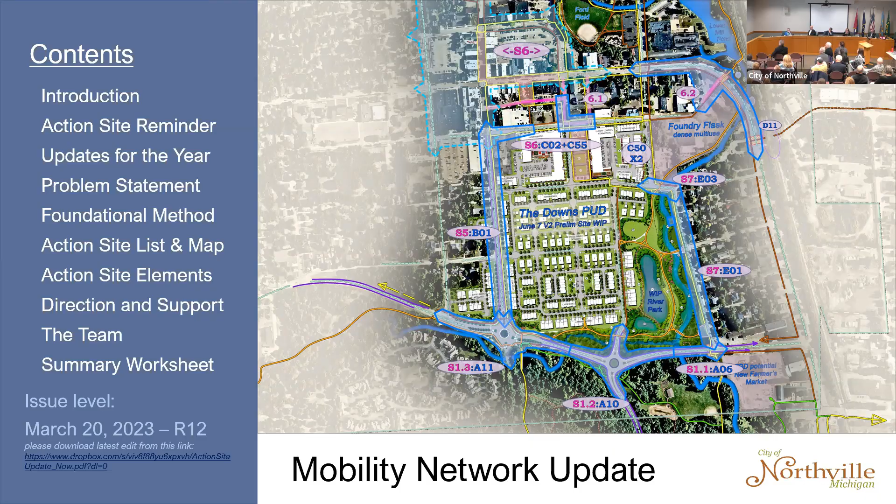For those of you who may need a quick review, these are the important points, I'm going to hit them all. New development and growth are captivating opportunities for the city, but they will bring safety, traffic, and disruption concerns.

The Mobility Network team was formed out of members of the Sustainability team, which I chair, and the River Restoration Task Force, which Nancy chairs. We identified challenges to having safe, walkable streets, effective and balanced traffic flow, and fluid connections between all our neighborhoods. We considered mobility and connectivity in total, working on a process to home in on sites that warranted urgent attention. Our conclusions focus on 5 critical and specific action areas important to the experience of Northville as the future unfolds.

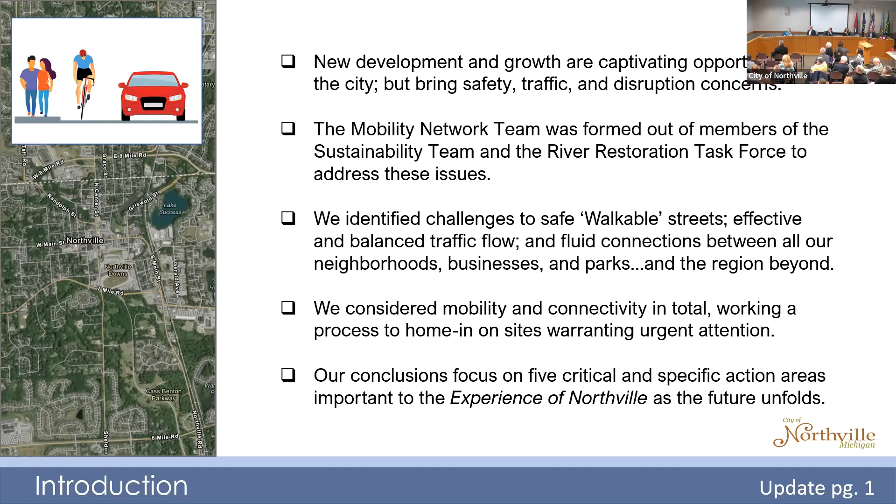This next slide I'll do quickly. I know it's very busy, but we've already gone around the ring on the first slide. I know this is detailed, but it's essentially the same slide from our presentation of November 2021 - same text, same 5 actions of top concern, the old map, called a reminder slide. The tough point is we were here with you over a year ago, and we're back, and the headline says still 1 year later - not a lot of movement. It's the same basic list.

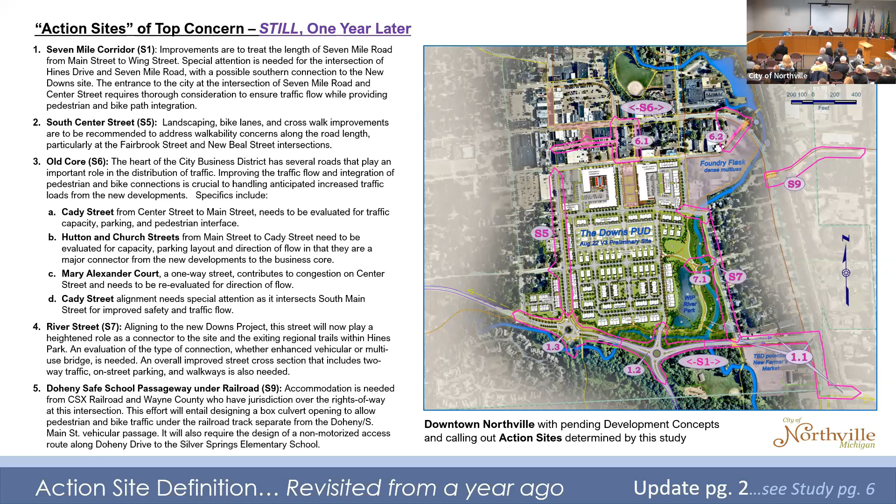But since then, we've done a great deal of new analysis with the hope that this bolsters our case for the needed actions. Moving on, this is a complicated slide, so I'll try to get through it as simply as possible.

The headline on the bottom says the mobility team verified traffic concerns. As you can see, this slide dives deep into traffic engineering, but it's in the deck because it provides the statistical analysis for why we need to make changes in our roads. Our position is Northville has a traffic problem, both pre-COVID and post-COVID.

Very simply, the big chart with the colors and grade letters tells you where the problems are. But just for credibility, to let you know what this team did, the reference books we utilized for process are shown in the upper left. The Traffic Engineering Handbook and the Highway Capacity Manual are longtime bibles for conducting traffic studies. We also made use of some very sophisticated software for the traffic analysis. We made every effort to analyze our streets as paid professionals would.

So we analyzed 34 street locations with comparisons to the Fleis and VandenBrink traffic impact study, done in the 2021-22 timeframe. As you can see from the 2 columns labeled F and V and ME for mobility, we attempted to mirror their study parameters. The colored boxes on the chart show the level of service for each intersection, graded from A to F, ranking the delay suffered by drivers on the road.

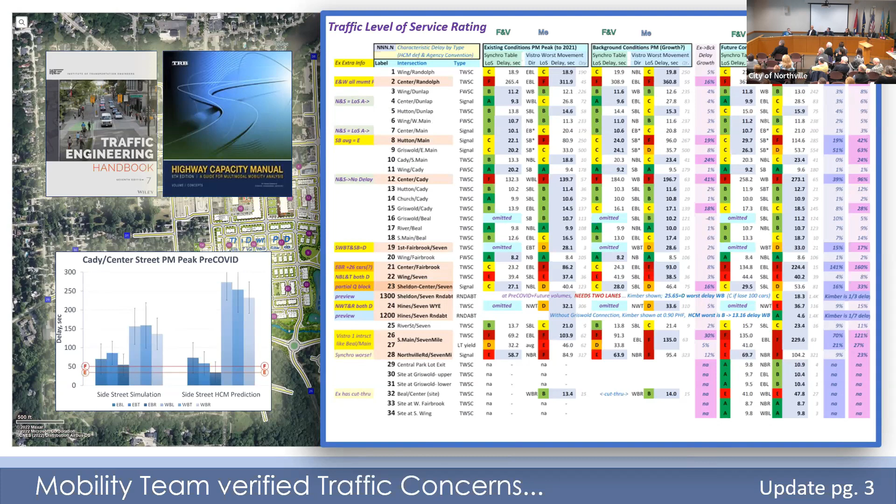So very quickly, let me give you a primer on the worksheet shown in the center, which will be helpful when Nancy presents. This is a snippet of our action sites list. Let's go through the symbols - the check marks in the boxes tell us who the lead is or who our partner is for each location, whether it's F&V, the city, or Wayne County. Looking at the key in the top right, a box in yellow means special attention required.

Good hands indicate urgent care is needed for pedestrian safety, and the civil engineer hard hat guy means an engineering study is required. We did this for the 34 street locations.

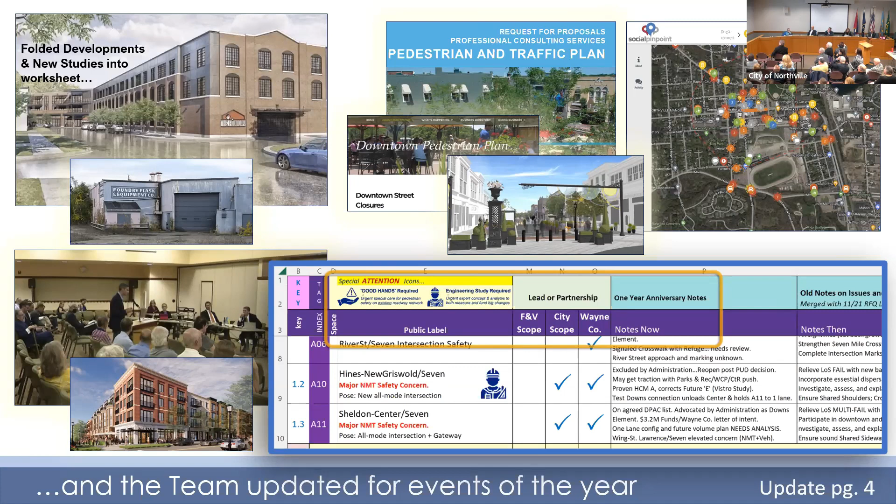Okay, that's your lesson for today. Here is our updated problem statement.

Let me introduce it. The Mobility Network team applauds the city's progress toward our stated goals of safe, walkable streets, and having effective and balanced traffic flow and fluid connections around the city. We return to you now to emphasize urgent needs that remain outstanding and to ask that they be addressed.

Some of these needs are within the scope and capability of consultants that are already on board. We are pleased to reinforce this work.

Other unaddressed action sites include those we consider to be very beneficial, but also the most difficult and costly to implement: linkage to Foundry Flask, the Downs, daylighting the river, Farmers Market, and additional projects throughout the city that also bring challenging timing pressures. Further engineering work is required here to address 5 of our most urgent needs, and we're going to recap those for you at the end.

So the bottom headline here says, best livable volume as a Northville goal. This is a three slide set. Each one builds on the other, leading to an important conclusion and a major recommendation. So hang with me on these slides.

First, if you're reading the text, future volume is not something you measure, it's something you choose. And we ask 2 questions: what volume of traffic does Northville want in the future? And what blend of either through traffic or destination traffic do we want?

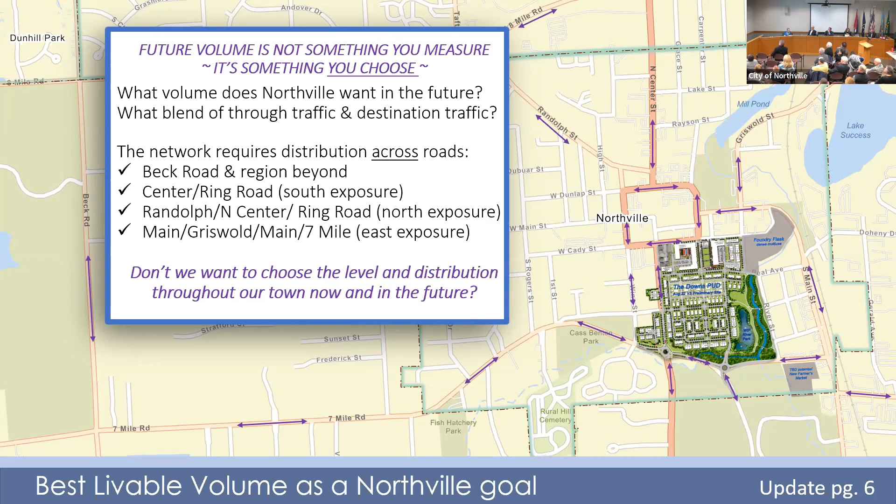The second slide is a city view. The headline: managing speed and volume, calming and dispersion. Within town, good traffic distribution requires multiple choices to achieve best livable volume. So you have to manage your traffic flows to do that.

Our traffic network uses these 3 check marks, these 3 main ways to get around downtown. The last one is in the future. It's how we get through town. It's not a straightforward route because we have changed the traffic flow.

You know this from experience, you know this from tonight, and you can see this with the pink highlighted streets. That's how we get around town today.

And that leads us into the last point, which is completing connectivity disperses volume, which strongly aids safety and comfort. We want to disperse traffic in a way that promotes a fairly shared burden of vehicles throughout our neighborhoods.

We heard all about that tonight. We don't want an unbalanced distribution through what has been an unplanned traffic dispersal.

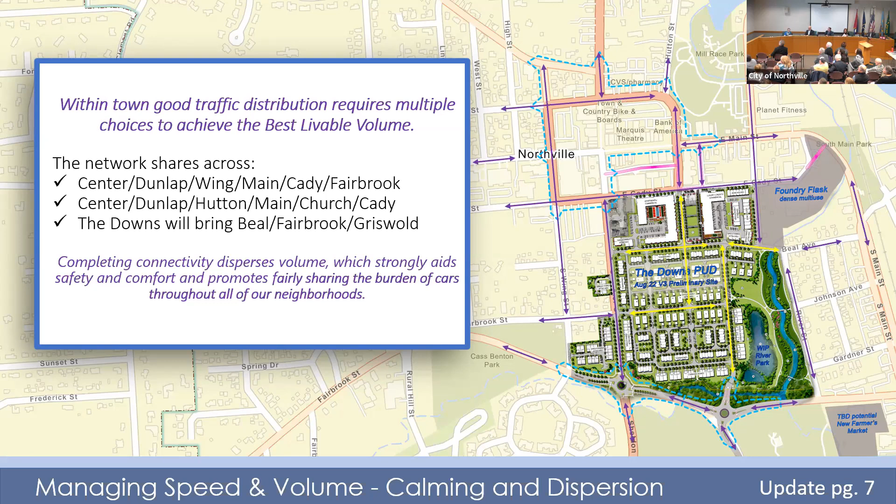Moving on. Okay, this is the final chapter: completing connectivity for best mobility through town. Our goal is repeated up top. Consistent with these goals, we recommend the following.

Open Center Street and implement traffic calming to slow things down and allow for event closures. Open Main Street and go with either event closures or seasonal closures.

And finally, importantly, build the southern connection at Hines 7 Mile and what will be New Griswold with the Downs and beyond. If we don't find a way out of that southern part of the Downs, you are essentially creating one big cul-de-sac at the south end, and that's not going to help.

Therefore, we conclude, as the purple says, this reestablishes the north-south and east-west connections through the business district. And with the building of the new southern link, we restore the city grid. This ensures the most effective connectivity through time.

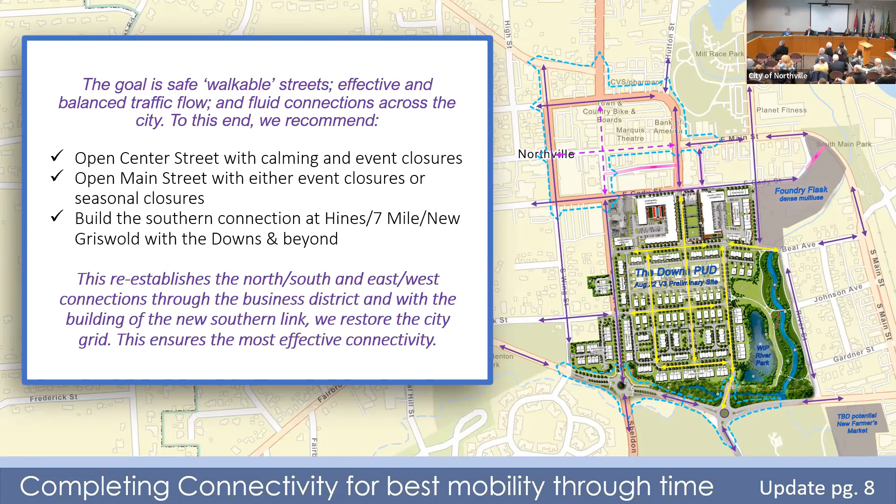Very quickly, bicycles depend on shared lanes and wide walks. I'm not Jeremy, I only do 4,000 to 5,000 miles a year as a cyclist. But mobility is not just about cars, so we looked at the interconnection with bicycles.

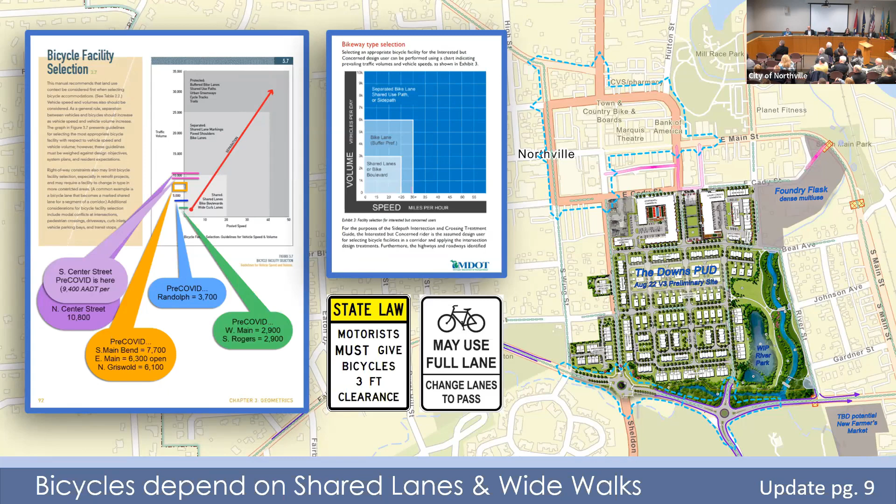Therefore, we're recommending that we handle bike travel using shared lanes. That is, having cars and bikes safely share the traffic lanes, and where possible, planning wider sidewalks, which are especially helpful to bikers who aren't comfortable with cars.

Simple as that. Finally, taming cars with bump outs and parallel parking.

This is also a nod to our past city efforts. We have a great history in trying to do the right thing, and much of it is related to traffic and safety. You can go all the way back to Main Street 78, and that's a history lesson for another time, but a lot was done.

Excellent work was also done on the strategic plan of 2006, and the work continued with the 2009 streetscape plan, and finally the secondary streets design standards of 2016, which the DDA supported. From all this, we received consistent advice for what we're recommending here, which is to slow down traffic by using bump outs and parallel parking. It's not a new idea. You saw it in all these reports, but it is an effective one.

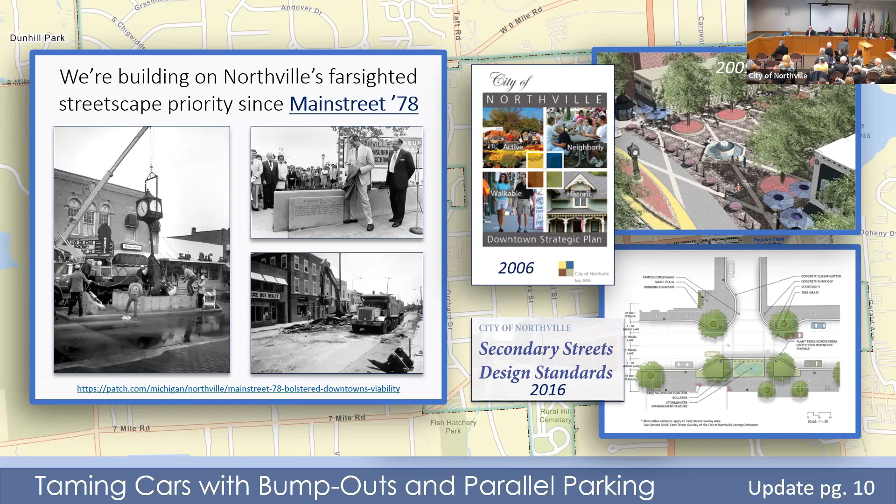With that, I'd like to turn it over to Nancy for a closer look at our action site recommendations.

Let's get down to the street level on these 5 action sites, which are specific intersections and roadways affecting the overall street network of the city. This network impacts traffic flow, connectivity to regional tributaries, roads, pathways, and pedestrian access. Action on these sites needs to be planned for, with an implementation plan created that considers the new developments about to take place.

This is the same map that Dave walked you through, but I want to stress once again that in the original plan, we spent months trying to identify where the action sites are that impact either gridlock or connectivity in the city. We identified these 5 in the original plan. When we reassessed that in the updated plan, we came to the same conclusions. These 5 actually determine the temperature of the traffic flow throughout the city.

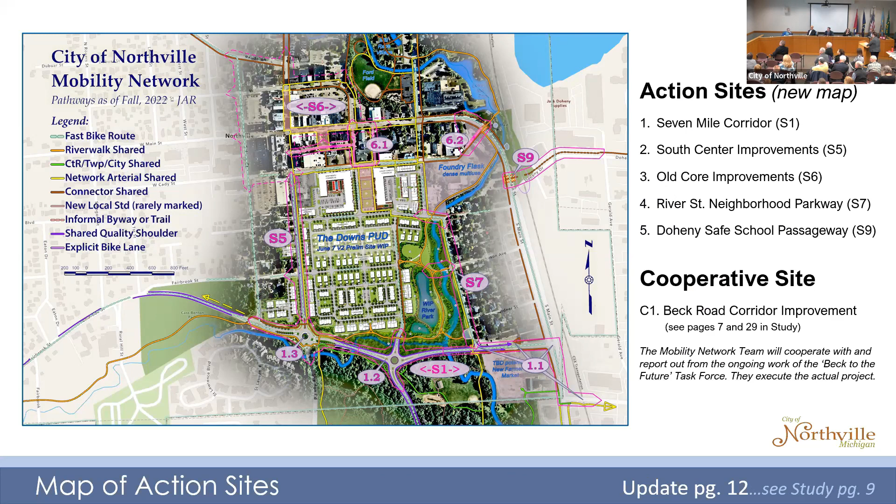South Center, the Old Core, the Business District, River Street, the Doheny Safe School Passageway, which we will discuss in more detail later, and the Beck Road Corridor Improvement Project, which we will not discuss because it's being handled by a different regional group. Improvement to these action sites will have the biggest impact on improving disbursement of traffic, building connections, and providing safe crossings for pedestrians and bikes.

We're starting with the 7-mile corridor because honestly, if you're really going to look at what is a major influence on how traffic comes in and gets distributed in town, you have to take in the 7-mile. It's a crucial road for the distribution and the consistent flow of traffic.

In the study, one of the big concerns was the intersection of 7-mile with the railroad tracks into town. I'm happy to report that the township is already addressing this issue through contracting engineering services of OHM and applying for a grant, which they were just recently awarded, to provide pedestrian crossing and an updated railroad gate system at the 7-mile Main Street intersection.

On Main Street, another big concern was the 7-mile left turn lane, and this is being paid for and addressed in the DPAC agreement. The River Street, the 7-mile, and the pedestrian crossing into what will be the future farmers market is also being addressed in the Downs DPAC agreement with an island refuge and a hawk light.

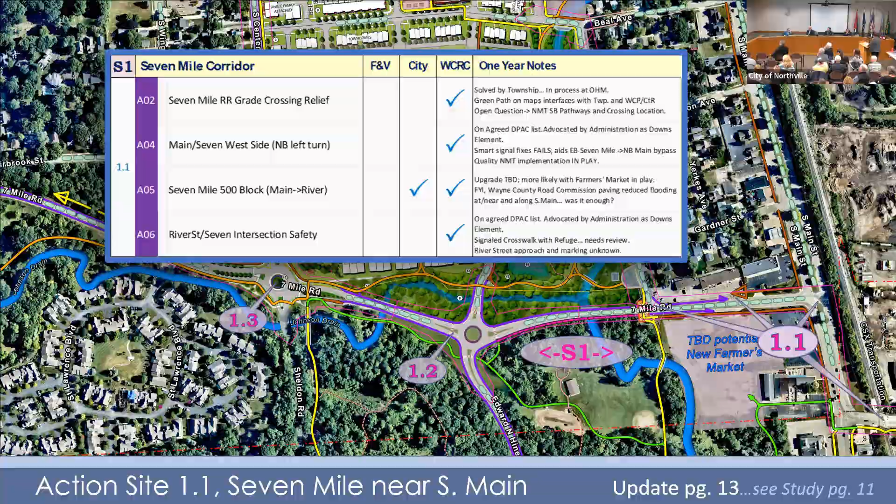But we've got 2 yellow hands. That's a warning, warning, warning. Bill Robinson, oh, excuse me.

At 7-mile and Sheldon Center, we are proposing a roundabout. This has received Wayne County approval. The engineering cost has been worked into part of the Downs DPAC agreement. The city was just awarded a carbon reduction grant of $1.5 million from SEMCOG. The River Task Force just submitted 2 congressional direct spending grants to Stabenow and Peters for $800,000 and a community support fund grant to Congressman Debbie Dingell for $800,000, specifically for construction. If those grants don't come forward, OHM will proceed with Mike Dominy to apply for safety funds for construction. What I'm saying is we are starting to move forward on implementing ways to handle the anticipated increase in traffic into town.

The 7 Mile Wing Street intersection, however, is an area that needs some engineering analysis, as the single lane layout does not lend itself to safe turning or merging traffic. So that should have a construction hat to it.

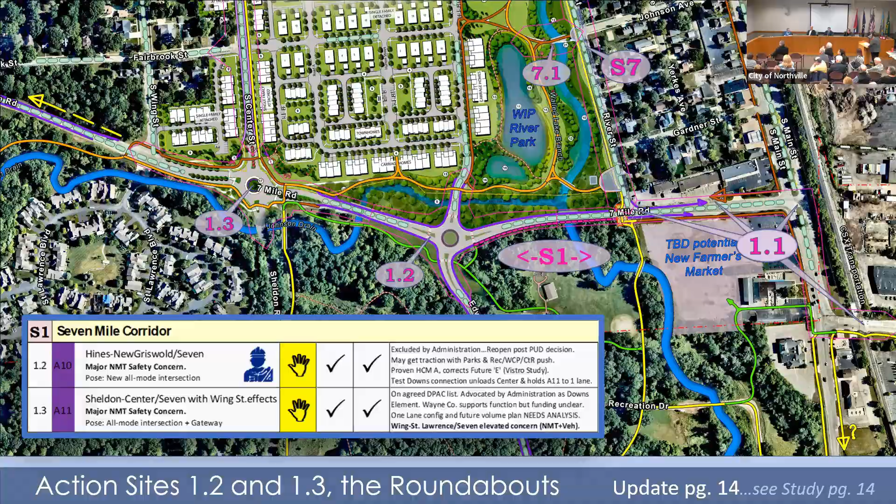We all wish for good things to happen in a timely manner, but since this is a long-term project, we had to look at the actual existing conditions of what we call the dangerous Y at where 7 Mile comes into Hines Drive. We are suggesting that we upgrade the shoulder of the 7 Mile roadway to serve bikes

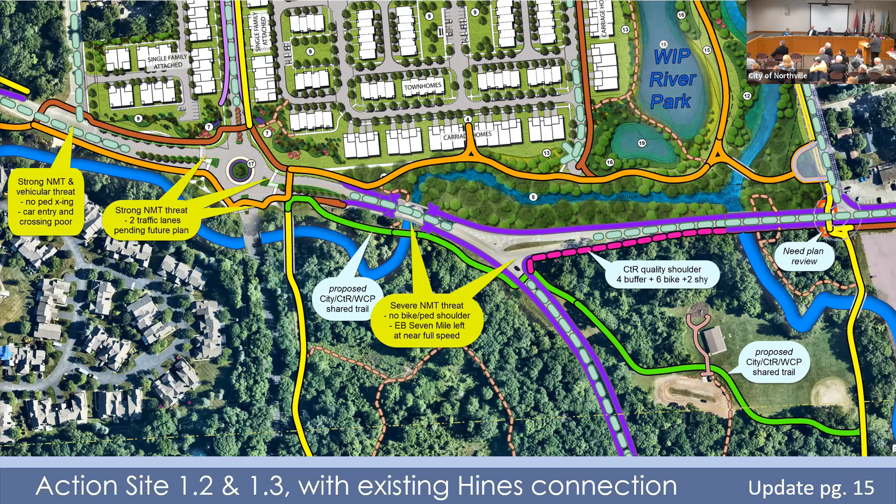going to Hines Parkway and the New Farmer's Market. We are also suggesting a shared trail, that's the green line, that will go all along 7 Mile into the Parkway. We have already met with Wayne County Parks to discuss their preferred route, and we know OHM started before Pat Sullivan left on laying out a bikeway pathway through a TAP grant.

Ultimately, we feel that this is the best solution for handling not only the traffic, giving access to the Downs and keeping it off Center Street, but the distribution of traffic onto 7 Mile in a safe manner. It will take some of the collisions that we have going on at that Y, and it will also minimize or reduce the stacking time there.

Although some people say this is a wish item, I'm going to say that as the Downs gets built out, we're going to see how important it is in the future.

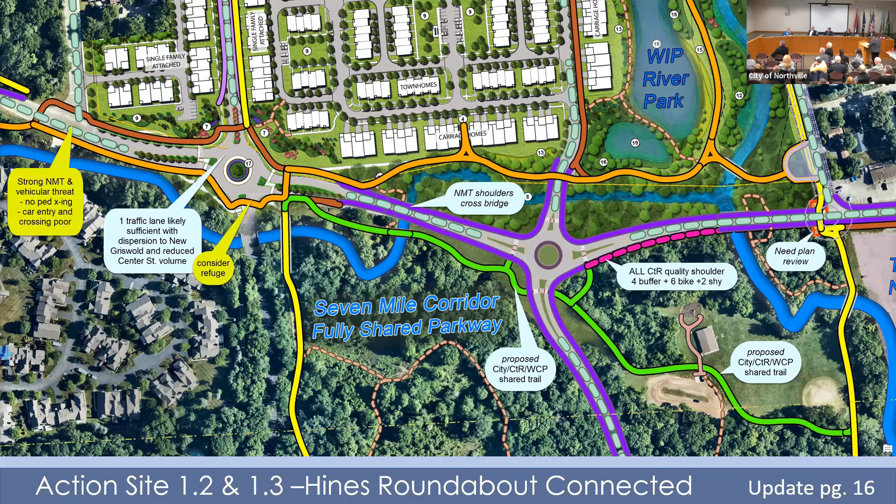South Center calming and distribution. South Center, if we like it or not, is the main drag in, it's the main drag out. It goes to the freeway. It is a major access point and it disperses traffic and it needs to be calmed down.

I love the picture, Mr. Demery, that you brought of the stacking cars on Center Street.

We do know that with the new Downs development, there will be some escape valves in it. But as we pointed out in that blue bar chart that Dave showed you earlier, it's still a series of fails at each of the intersections, because of the time it takes, or the duration, for you to get a break in traffic to come in and out of those intersections.

We are going to recommend reducing the traffic speed from 35 to 25. That keeps this road off of Google Maps and Yahoo recommending it as an alternate route.

We are going to suggest bumping out the intersections to calm traffic and provide pedestrians a safe way to get out past parked cars. We also suggest introducing parallel parking along Center Street, which it doesn't have right now, at least from Fairbrook going north, where there are painted bike lanes. These bike lanes actually don't go anywhere right now.

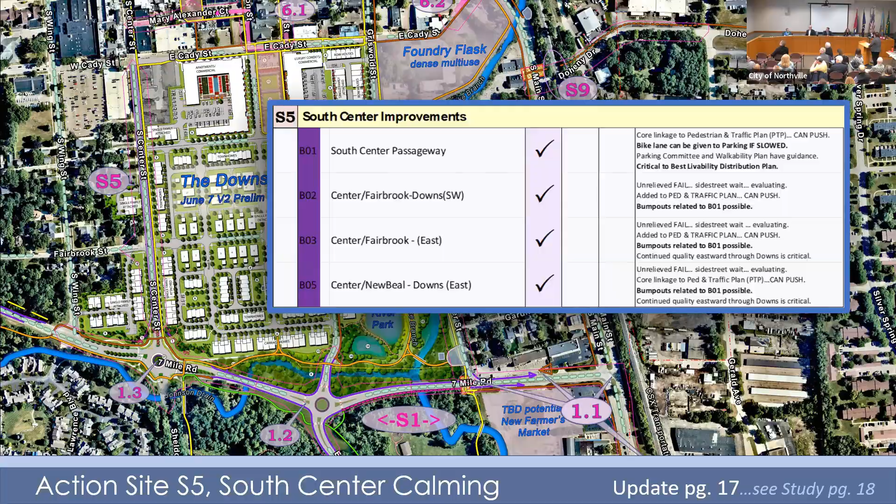We are suggesting that the walkway on the east side of the road on the Downs project is widened to 10 feet so that people coming down that Sheldon Road bike path can continue into town — those are the people with strollers and baby buggies hooked onto their bikes and stuff like that. Otherwise, we are going to the system that Dave mentioned before, an older city, which is that we would have to share the roads.

Walkable South Center. This is an illustration. If you look at the section view here, you'll see that OHM actually has a proposal for the roundabout with an island coming into Center Street. We are suggesting shortening their original proposed island, introducing parallel parking, bumping out the corners, and widening the sidewalk to 10 feet.

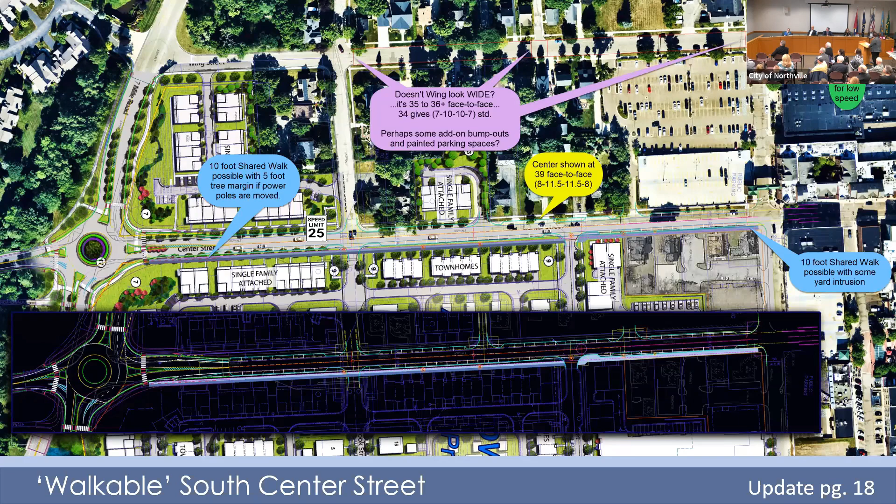We are also proposing that the boulevard tapers into the road naturally. Once again, reducing the speed to 25. Old Core business — as you can see, almost every road in the downtown business district has something that we have to take care of.

There we go, those are yellow flashing lights again. But let's look at it. Center and Cady offset is one of the major things we're going to have to look at: Griswold to Main, North and South, and Cady from Main Street to Center Street. We are really asking for probably some engineering studies on those in addition.

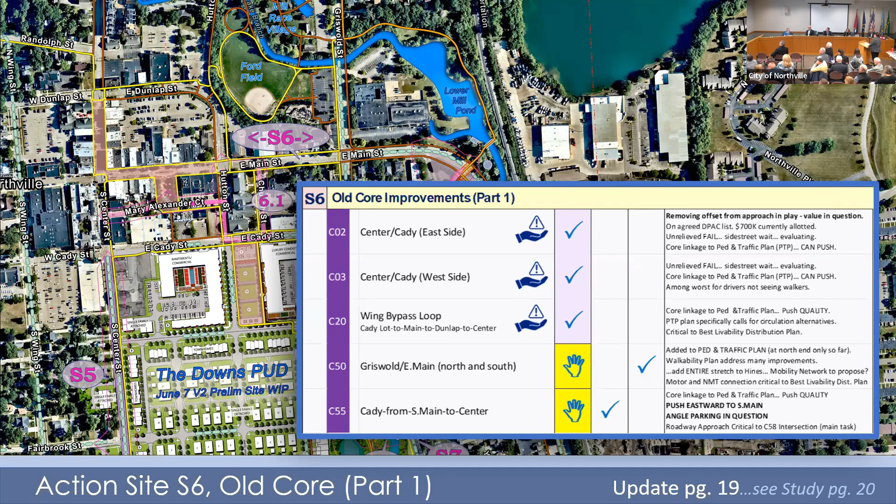Cady Street offset — just recently, Mike Domini informed us that they put 4 stop signs here, and since then, they have not had an accident. Before that, they frequently did.

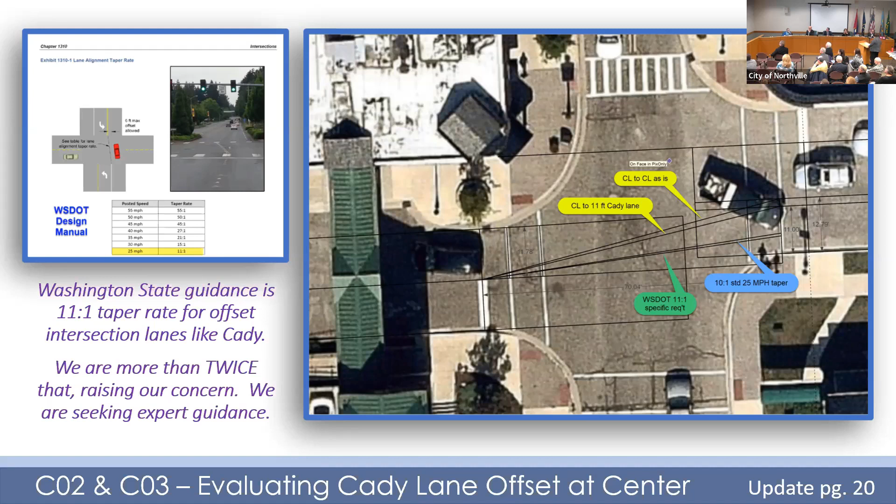We also found out from research that the standard acceptable rate for an offset is 6 feet, and as you can see, it is way more than that. So we are recommending that a hard hat is on this intersection, and we actually need engineers to evaluate it. Is the stop sign going to be enough, or do we need to do something more physical dealing with the right of way and the curb line?

Old Core Part 2, as you can see, this is a very difficult area because these streets probably go back to the 1800s, and they do not really suit modern vehicle sizes or traffic. But nevertheless, they are part of our patchwork quilt, as Anna Mary Lee pointed out, and they actually are part of the most quaint part of the city.

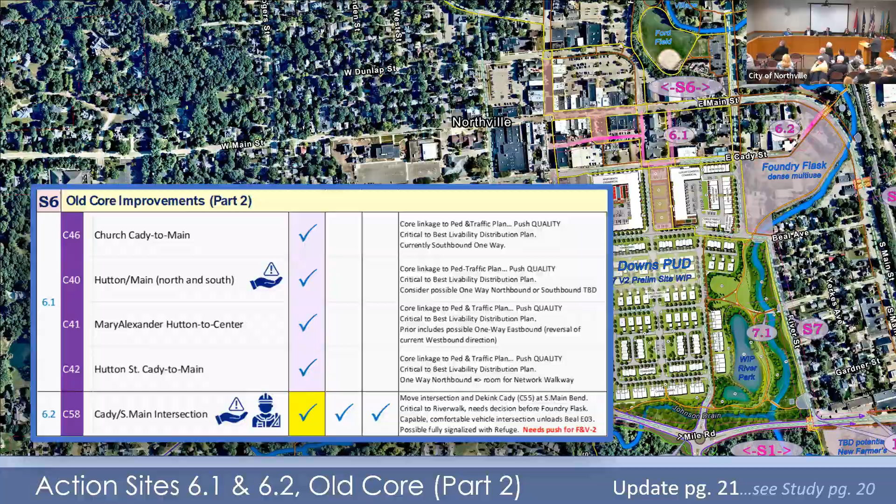So we had to do a very deep dive analysis of Church Street, Hutton Street, and Mary Alexander. One of the first things we noticed is we needed to improve the non-vehicular connection between Cady and Main up Hutton Street, where the church is, and Jim Long's place is. You almost take your life in your hands trying to walk up there nowadays.

We are proposing realigning the curb behind Presbyterian Church to ease child drop-off and to also make it a cleaner and more lined up intersection on Cady and Hutton.

But grab your seats, because this was a long and drawn out process for us to evaluate the data on this. We are recommending changing the direction of Mary Alexander Court. The current direction does not work if the streets are closed or open, because what happens is you need a relief valve off of Center Street going eastward, and not the reversal, which is dumping more street into a street that already has a tremendous failure rate. So we are recommending changing the direction of Mary Alexander Court, and hopefully nobody of you knows where I live.

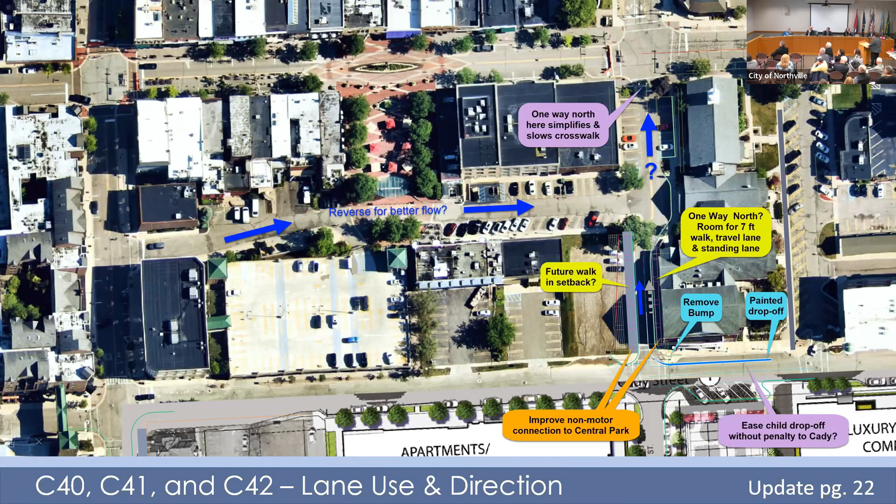By accomplishing this, we have now created, much like our human body, a circular system for traffic. So if you do not find a place to park, you can circle around. If you're dropping a kid off at the nursery school, you can circle around. And you can do that in a safe way through this, what we call positive circle of life, basically in Northville. There's Cady Street, Dekinking.

I'm glad Mrs. Jafer's here. I want to let you know that this is a major concern of us.

In fact, the whole Cady Street corridor is a concern for us because we think it is the next economic development corridor for Northville. And as such, we cannot afford to have this 18th century fish hook going into South Main. It's not safe. You got to turn on a blind corner.

So we are recommending straightening it out into the curve of Main Street with appropriate traffic lighting, striping, and crosswalks. We are also proposing routing the Riverwalk along the shore and bringing it across at that spot too. If you actually stand out there for a while, you'll notice that people stop there naturally to look at the beautiful water wheel and the dam that the mayor just opened. So it actually kind of is a natural stopping point.

We also had to address the Doheny Safe School Passage under the railroad. My daughter used to live at Highland Lakes, and it is terrible to get through there. You take your life in your hands.

Anyways, what we're proposing there is that we work with Wayne County and SEMCOG, who've offered to assist us in holding a meeting with the railroads and actually come up with a design of a box culvert, another box culvert that goes under the tracks. And there is special funding available right now. The federal government just passed a Connect America grant that deals with railroads severing towns or rivers or highways. And there's also the Safe Routes to School funds.

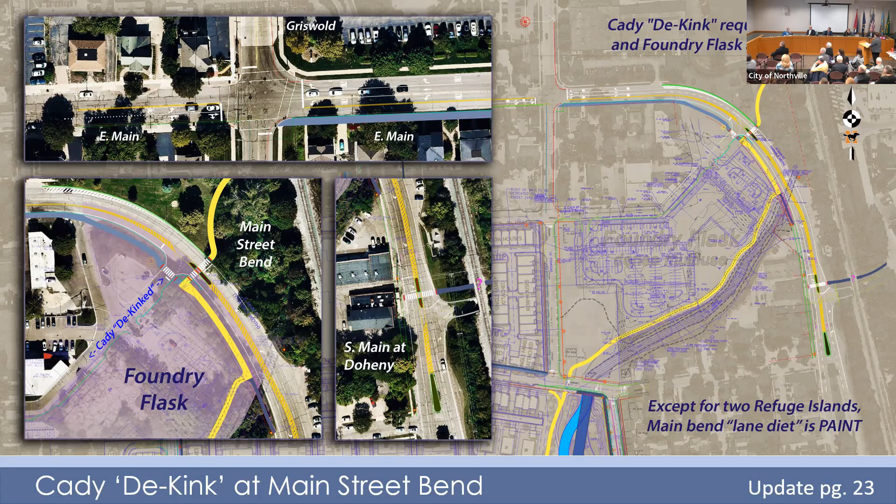What we're looking at is making improvements there because of the bikeway coming out, which tells us we can realign the lanes with striping and make this intersection much safer and better. We can have one through lane going east, one through lane going west, one left turn going north onto Griswold, one left turn going south onto Griswold also. In other words, we have a dedicated place to turn at that intersection. We can have a right turn lane going onto Griswold off of Main. This will allow, instead of 4 lanes going into 2 lanes, a gradual integration of the through lanes into the 2 lanes when you proceed on Main Street. To be honest, it's a very cost-efficient way of making a much safer intersection, and it provides a right turn lane for trucking since this is a dedicated truck route for the city.

River Street at Beal, we need to redesign River Street. Has anybody been on River Street? The surface of the moon is smoother than River Street. So we need to actually come up with an engineered design, a real design for River Street that takes into account parking on both sides, walkways on both sides. One of the walkways would be in the river park, and the developer has agreed to do so. It would also have extended bump outs at the intersection so we could slow down traffic going down Beal Street, so it doesn't just peel into Beal Town.

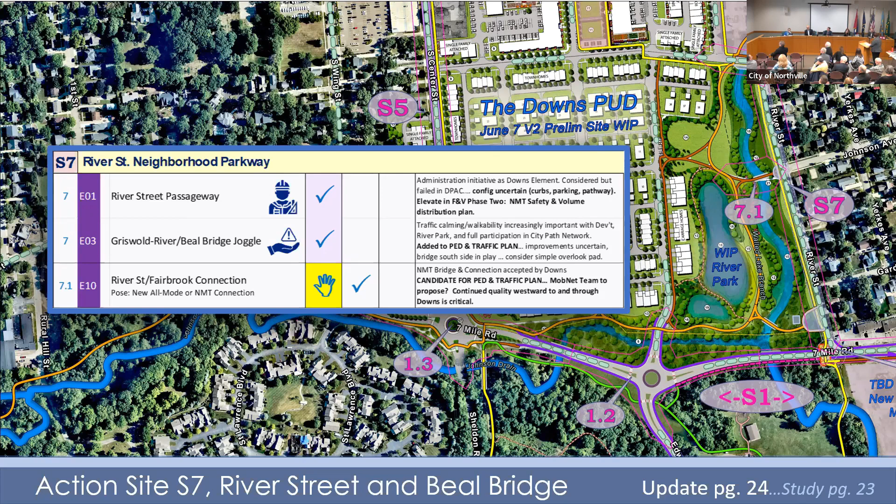We want to provide a shared pathway along River Street in the River Park that also connects to the new farmers market. As mentioned before, the development agreement already proposes safety treatments to a crosswalk, a HAWK signal, and a safety island in the middle. In order to slow down traffic traveling Beal Street, we recommend a bump out at all of the corners, especially at Beal. We have a blow-up of that there, and we realized we actually have the right of way to do it, so that made all of us very happy.

We recommend that we adopt a secondary street width on River Street, with 7-foot parking on one side, two 10-foot lanes either way for two-way traffic, and another 7-foot zone for parking on the other side of the street. This would be the configuration of what we refer to as a secondary street.

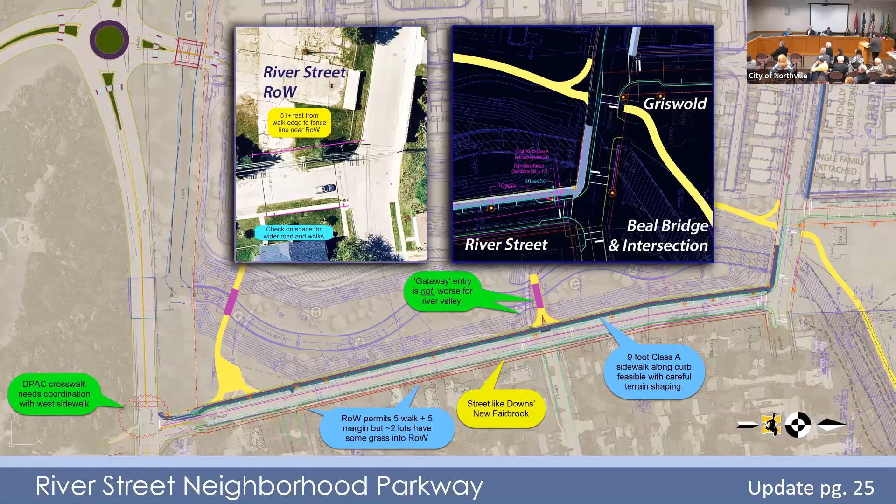The other thing is we gave high priority to pedestrian connections from the River Park to River Street, with entry plazas, kiosks, and signs. We are suggesting that the pedestrian bridge coming off of Fairbrook over the river be located to line up with Johnson Street in Beal Town and connect into River Street.

Doheny School Passage: all of the families moving into Downs, their children will probably be going to Silver Springs Elementary School. As such, it'll be imperative that they find a way to get under that railroad track in a safe manner. So we are suggesting you plan a route under the track that connects to Highland Lakes Development and Silver Springs Elementary School through the non-motorized project currently under contract by the city. In other words, what we're asking you to do is make sure that consultant includes a solution at the Doheny crossing, because if they do, it allows us to possibly apply for additional engineering grants.

We need to secure support from Wayne County. SEMCOG has already given us support. I guess they have a railroad guru who said he would try to set something up with the railroad. But we have to have a strategy with Wayne County, not only on 7 Mile and Main Street, but also the Doheny Safe Routes to School. We need to partner with the Northville School District to apply for funding because they get extra points on the Safe Routes to School grant program.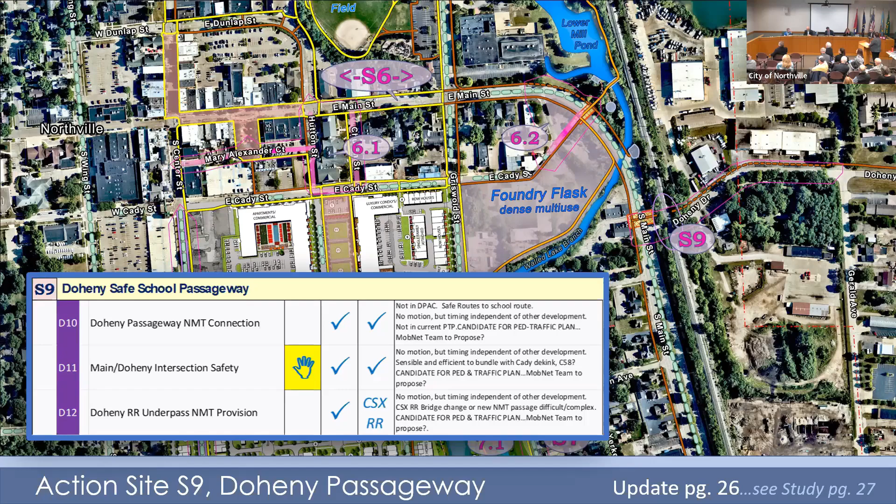So I want to take this time before we close out the show to thank Mike Dominy. Is he still here? He's in the back. Would you wake him up, please?

I want to thank Mike Dominy, who included the MobNet team and some preliminary analysis with Felice Vanderbrink, who was hired by the DDA and also the city to look at the pedestrian walk thing. I think the exchange, Mike, you'll agree, was both entertaining and very productive as we exchanged ideas on how to handle both moving traffic, moving cars, moving bikes, and keeping people safe.

I want to also thank OHM, who collaborated with the River Task Force in applying for these congressional direct funds. We had to do it in less than 3 days. We had no sleep. And I learned that engineers do not do well when you call them at 11 o'clock at night because you want to change something in the grant agreement. But they were very kind with me, and we did get it in.

And I want to thank the mayor for pressing our elected officials to give us our letters of support. I point this out at this time because I want the city, the residents of the city, to understand what incredible things we can pull off when we work together.